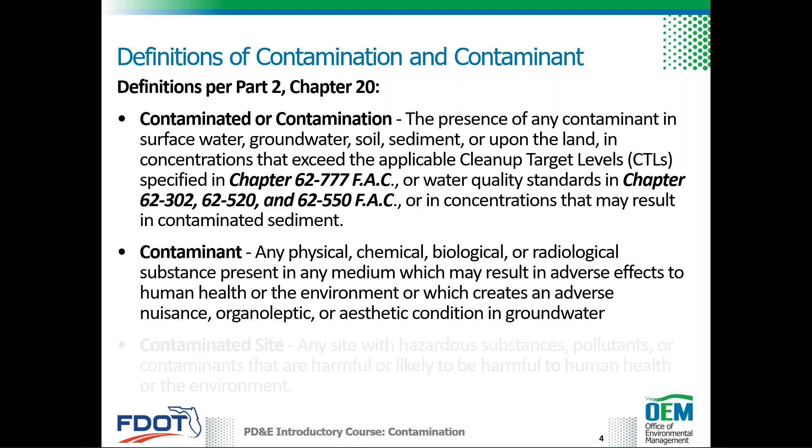And what is a contaminated site? A contaminated site is simply any site with hazardous substances, pollutants, or contaminants that are harmful or likely will be harmful to human health or the environment. So let's talk about risk as it's associated with contamination. Risk has two variables: consequences times probability. Consequences are the severity of impacts due to contamination. Probability is the likelihood that those impacts may occur. There are several types of risk associated with contaminated sites, including human health risk and ecological risk.

There are various steps in a risk assessment that were developed by the United States Environmental Protection Agency, or EPA. First is hazard identification. The first step in a risk assessment is to figure out what you have in the environment that's causing the issue, what type of contaminants you have that may be causing harm to humans and/or ecological systems.

The second step is the dose response assessment, which looks at the numerical relationship between the exposure and the effects of that exposure. Then you do an exposure assessment, which examines what is known about the frequency of the contaminants, the timing, and the levels of contact that you as a human or ecological receptors may have.

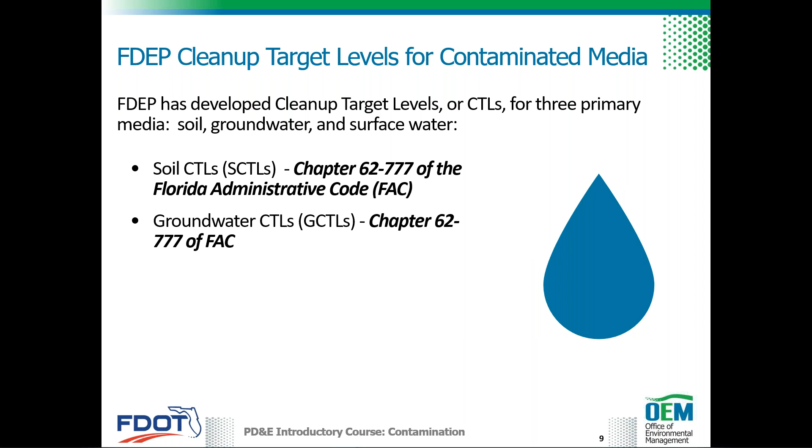Soil cleanup target levels, or SCTLs, can be found in Chapter 62-777 of the Florida Administrative Code, or FAC. Groundwater cleanup target levels, or GCTLs, can also be found in the same chapter. Your freshwater and marine surface water cleanup target levels can be found in Chapter 62-777, 62-302, 62-520, and 62-550 of the Florida Administrative Code.

The EPA, the DEP, and the Occupational Safety and Health Administration, or OSHA, have developed different guidelines for concentrations of contaminants in the air that can be inhaled. These are relevant for DOT projects in the form of asbestos and/or lead contaminated particles.

Let's look at some soil cleanup target levels. These are calculated by the DEP and are provided for direct exposure residential, for direct exposure commercial or industrial, which means those contaminants that could be associated with the soil beneath a building, a factory, or an industry. And then you have leachability of soil that can leach into various different types of water media, especially groundwater.

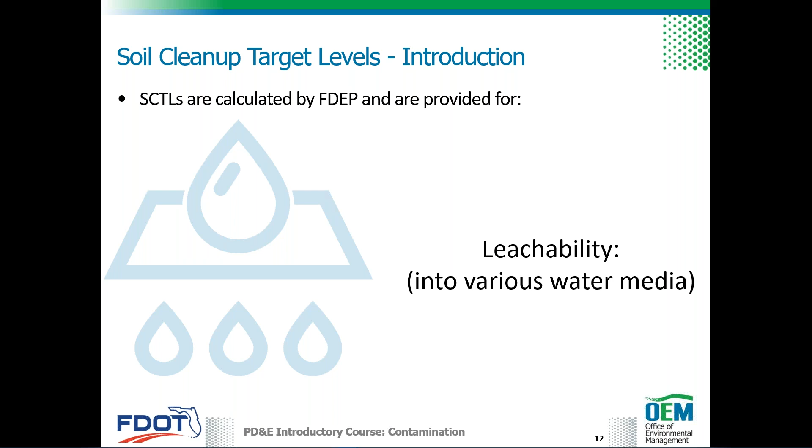Let's look at some soil cleanup target levels. In general, the direct exposure residential soil cleanup target levels are lower than the commercial or industrial, simply because you have different populations that could be affected by those types of contaminants, particularly the elderly and children because they live in residences. And then you have leachability based on groundwater.

These concentrations can also be lower than direct exposure because the value is based on the assumption that the contaminant will be ingested via groundwater, meaning that you're using the groundwater as a potable water source. And then commercial and industrial direct exposure SCTLs are applicable to soils within the DOT right-of-way. So these are the SCTLs that you folks are going to be most concerned with.

There are different units for soil and groundwater. The units for soil are typically measured as parts per million or parts per billion. Parts per million is equivalent to milligrams per kilogram, and parts per billion is equivalent to micrograms per kilogram for soils. For groundwater, ppm or parts per million is equivalent to milligrams per liter, and ppb or parts per billion is equivalent to micrograms per liter.

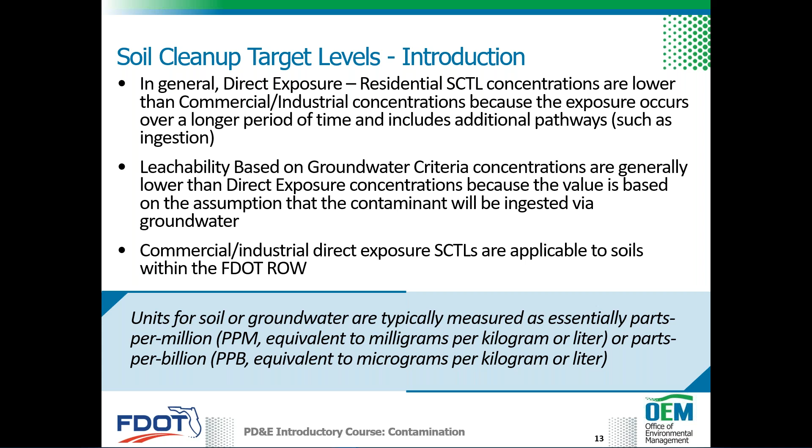So let's look at groundwater and surface water cleanup target levels. They're calculated by the DEP and are provided for the following types of waters: groundwater, freshwater surface water criteria, marine surface water criteria. You'll notice that the surface water criteria is broken up into freshwater and marine, so it depends on what type of water body that you're in, whether you're in a freshwater body or saltwater body. And you also have groundwater of low yield.

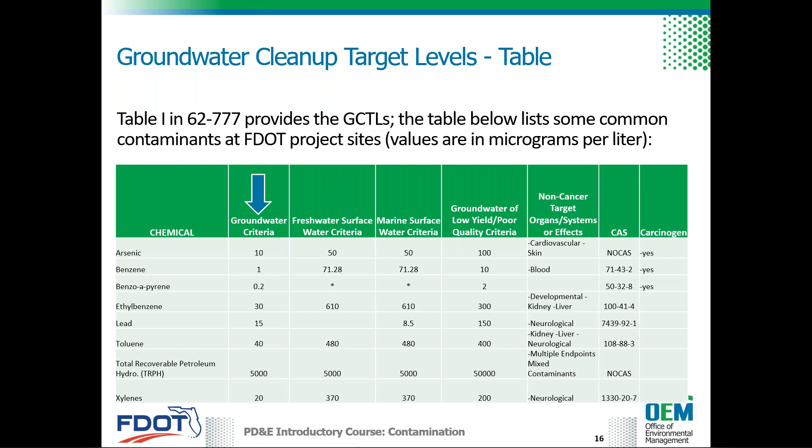So let's go over some acronyms associated with contamination regulations that you should be familiar with.

First one, US EPA, United States Environmental Protection Agency. That's an easy one. It's the federal agency responsible for developing environmental regulations as well as enforcing them. The Florida Department of Environmental Protection has been delegated by the US EPA to ensure compliance and enforcement of environmental regulations. And also RCRA, which is your Resource Conservation and Recovery Act - these are federal regulations that pertain to solid and hazardous waste.

CERCLA is your Comprehensive Environmental Response, Compensation and Liability Act. These are federal regulations that govern the cleanup of abandoned contaminated sites, and this is where you'll hear Superfund, or this is the Superfund law.

And then you have HSWA, which is your Hazardous and Solid Waste Amendments that amended RCRA. SARA, which amended CERCLA, is your Superfund Amendment and Reauthorization Act. And then finally, NPDES, which is your National Pollutant Discharge Elimination System. These regulations pertain to stormwater and dewatering discharges. One thing that everyone should keep in mind is that not only do you have NPDES regulations on the federal and state level, but you can also have them on the county level.

For example, here in Miami-Dade County, Code Chapter 24 also provides information about the specific county regulations for their NPDES program.

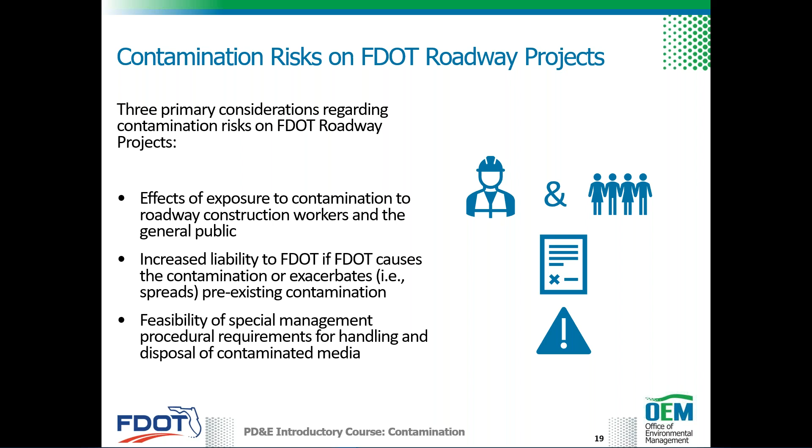There's some regulatory drivers related to this contamination issue, and the primary ones are Chapter 376 and Chapter 403 of the Florida statutes. And also there's some Florida administrative codes - 62-302, 62-550, 62-701, those ones. But the primary issue really is in Chapter 376, which is the pollutant discharge prevention.

And there is a section in there that says this: FDOT is not subject to liability imposed by these chapters for pre-existing soil or groundwater contamination solely due to its ownership. But there's a caveat - it says, however, liability may apply if FDOT creates or exacerbates a pollution source. That's kind of an important thing to know.

There's some other regulations like Florida Administrative Codes 62-730 and 62-780, and the other ones that Laura was mentioning: RCRA, HSWA, CERCLA, and SARA. All of those apply when we're looking at assessment, remediation, and disposal.

A couple of things related to DOT's obligations to federal highway, especially when it comes to NEPA. There is a contamination impact requirement. DOT assumes federal highway's responsibilities for NEPA, especially for the state highway system and the local agency programs. Federal highway has the responsibility for anything with federal funding.

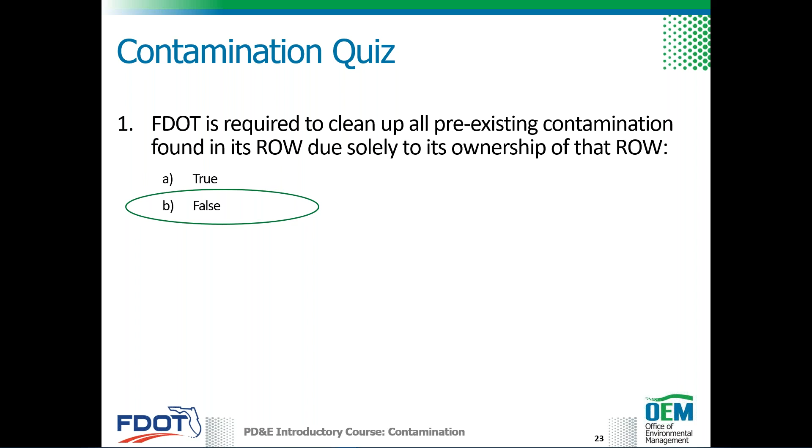Some other considerations for contamination projects: there's a contamination level of effort that increases as you go from PD&E through design to construction. There should be avoidance methods during planning and PD&E, and the impacts need to be considered when you're looking at design modifications or crafting special provisions, especially how you're handling and disposing of contaminated material.

Contamination is normally addressed by the DOT PMs and the DCICs, but it could include right-of-way staff, design, construction, maintenance, and OGC.

A couple of definitions and acronyms we probably should go through. First one is the DCIC. What is the DCIC? He or she is the primary person responsible for addressing contamination issues in your district, usually out of the environmental office.

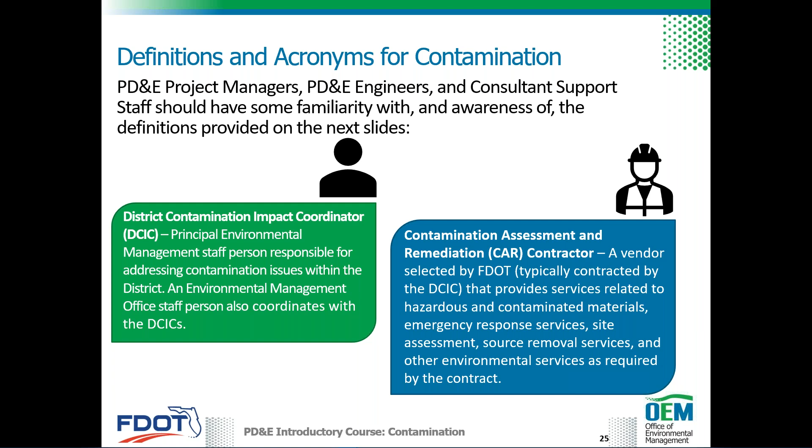Also, there's a contamination assessment and remediation, or CAR contractor. It's usually a vendor selected by DOT, typically by the DCIC but not always, that performs the services for the hazardous and contaminated materials, as well as several others.

The level 1, or CSER, Contamination Screening Evaluation Report, is an evaluation of potential contamination along all proposed project alternatives, and it's really used to determine the scope of further assessments.

The level 2, also known as an Impacted Construction Assessment or ICA, is the detailed evaluation of those sites and really is done for the medium and high rated sites. You're looking for the extent and type of contamination, and also determining any potential construction impacts, possibly even associated costs.

That then leads to the level 3, which is the actual remediation or abatement of that contamination. There's usually a detailed plan for the removal and disposal of media and storage tanks or any other contamination that is needed.

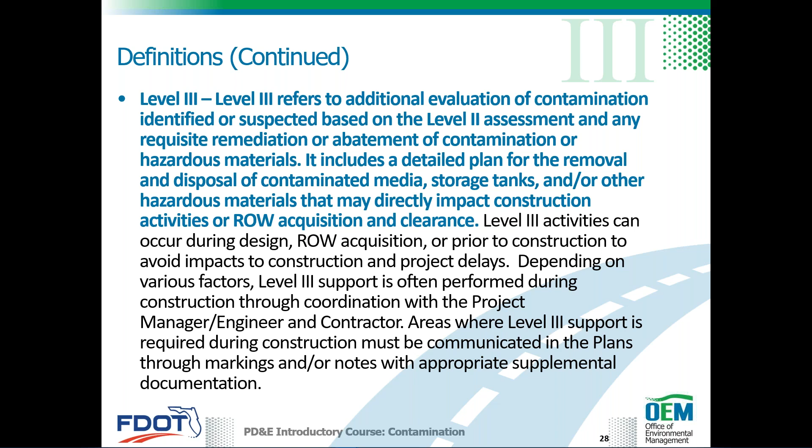Some other frequently used acronyms: ACM. Let's talk a little bit about that. Asbestos containing materials - this is any material that has more than 1% asbestos.

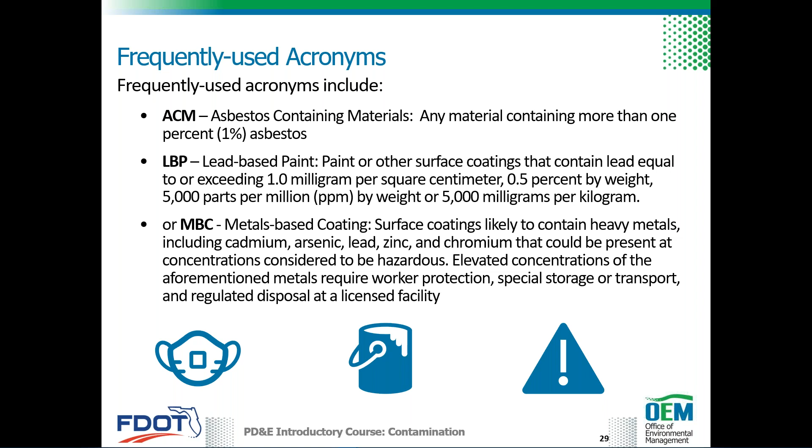Lead-based paint is paint or other surface coating where the lead would exceed 0.5% by weight. There's also metal-based coatings, which are coatings that can contain heavy metals, including cadmium, arsenic, lead, zinc, and chromium, present in concentrations that would be considered hazardous.

A couple other ones to talk about. The MSP, this is the Modified Special Provision - a provision to address a specific project need, usually approved by the state specification engineer. And then we have a technical special provision, which is the technical version of a special provision that you would need for any technical issue, such as contamination remediation. That should be included in the appendix for the contractor's information.

And that's all we have for this first one. Please let me know if you have any questions.

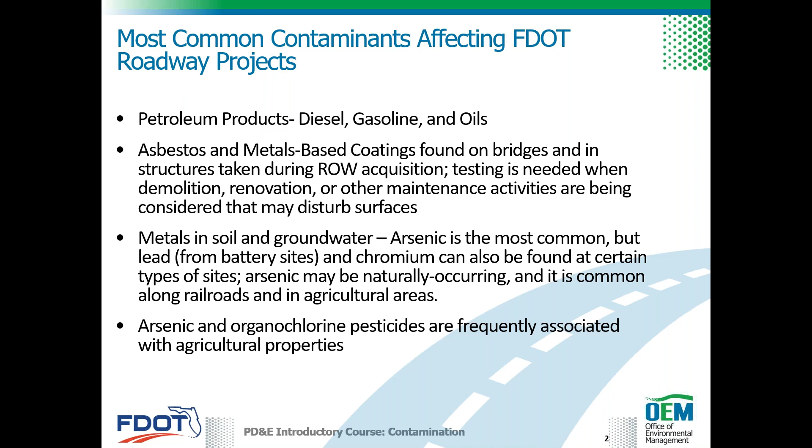While some of these wastes may not technically meet the definition of contaminated or hazardous, FDOT often uses a contractor to handle their removal and disposal.

Here are some project considerations. We're going to run through several of these for your FDOT project during the PD&E phase or early in the project phase. Has an evaluation been done to identify potential sources of contamination that may overlap new right-of-way or project alternatives? Has somebody already looked at this? Are there impacts to design, or are avoidance measures possible? Can we avoid the contaminated sites, or do we need to account for them during the design?

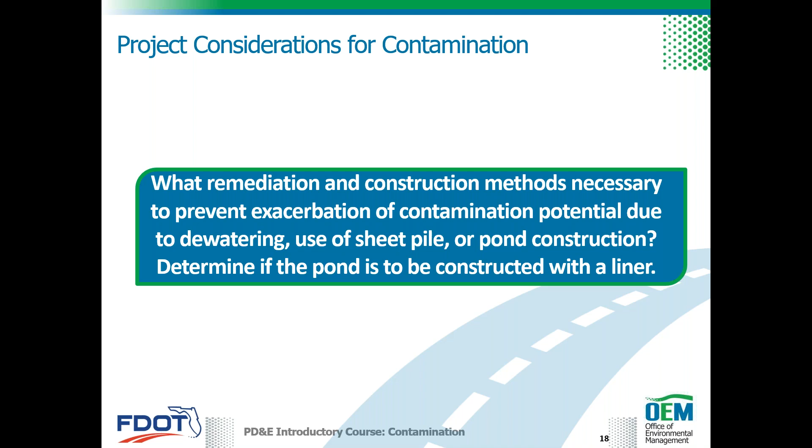So those are all some considerations for contamination when you're reviewing your project. We're going to talk a little bit about how to do that, different sources of information that you can use to review the contamination potential. Reviewing the potential scope of contamination involvement involves steps in every phase of the project. The goal of contamination review is to identify contamination issues early so that they can be avoided or minimized. The level of investigation may increase as the project progresses, but only if it's warranted.

The first part of the process is the ETDM screening and project scope development. The ETDM screening allows for early regulatory review of the project. The planning screen helps identify potential contaminated sites within or adjacent to the project, while the programming screen helps determine whether a level 1 investigation may be needed.

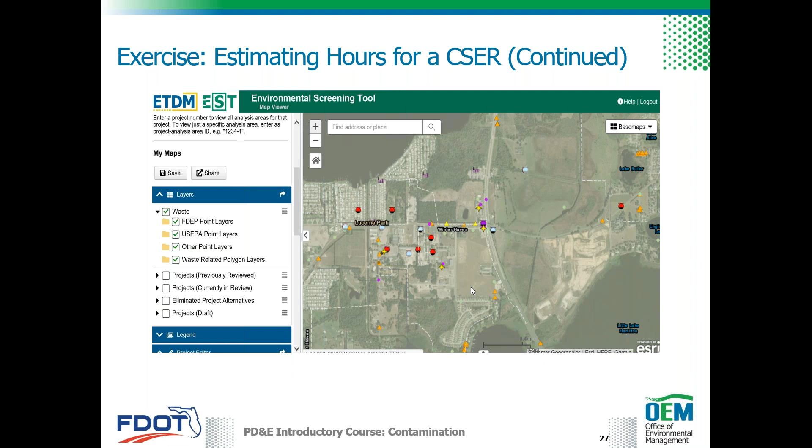After reviewing the ETDM EST physical contamination waste layers screen for the entire length of the project, a total number of 32 potential contamination sites were identified. The 32 potential sites were multiplied by 3 for their moderate complexity and potential available documents. So remember, it ranged from 1 to 4, and this estimate chose 3. And that gives you a total of 96 hours.

Since the project length was between 5 to 10 miles, the estimated field work hours were 24. Remember, it was a maximum of 24. 40 hours were allocated for the report, which is part of the formula, and added to the analysis hours, which yields 136 hours for the analysis and reporting. Then the total hours for the entire CSER effort are estimated at 160 hours.

While this exercise provides a good ballpark estimate of the CSER hours, it is not used by all districts. The DCIC in each district should be consulted to determine if there are additional considerations and to approve the hours for specific projects. So this is just an example, and you can go through it with your DCIC per district as you guys are developing hours.

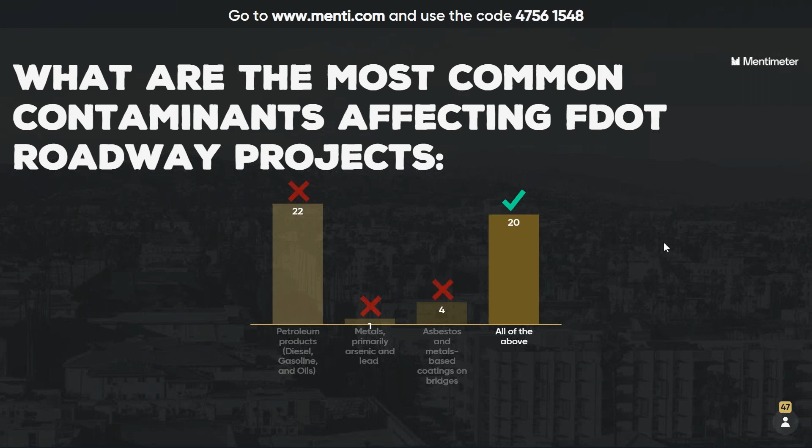All right, let's go to the second question here, and we'll see who is in the lead. Question 2 of 2. The potential presence of USTs and ASTs in a right-of-way acquired by FDOT is an important consideration regarding contamination. True or false? Time's up. True. Potential presence of USTs and ASTs in a right-of-way acquired by the FDOT is an important consideration regarding contamination. Nice job. All right, let's see who won.

Bodie McBoatface. Very nice. Followed closely by the Penguin and Chelsea. Nice job, you guys. Woohoo. All right, I am going to pass the presentation back over to Lauren. Thank you. All right, can you guys see my presentation screen? Yep. Perfect. Thanks, Christina.

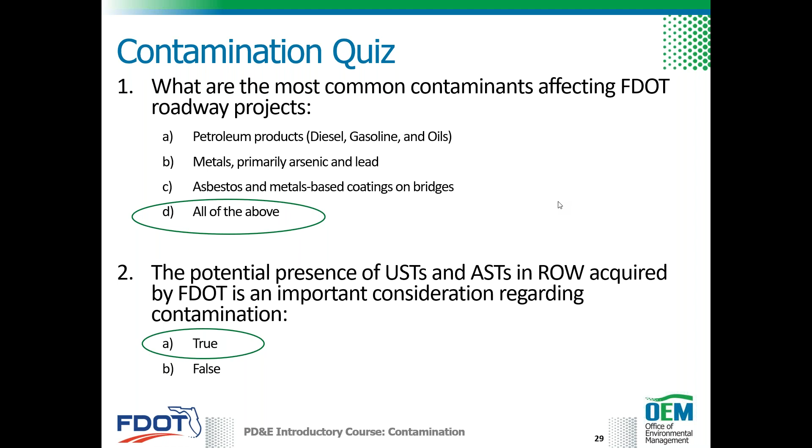All right, so now we're going to talk about some of the environmental documents during PD&E. Environmental documents are developed as part of the NEPA process and are required to contain contamination information. The contamination documents are used to support the following types of documents as part of the NEPA process. So remember, these are required. Type 1 and Type 2 categorical exclusions, or CEs, and non-major state actions. These are your different types of environmental documents, by the way.

Environmental assessments and environmental impact statements, or EA and EIS, you'll hear that term a lot. State Environmental Impact Report is a SEIR, and then reevaluations, which we will be talking about in a later lesson. For both Type 1 categorical exclusion and a non-major state action, or NMSA, contamination involvement is considered, and a brief summary is included in the appropriate checklists.

Type 1 categorical exclusion checklists use form number 650-050-12 under Part 1, Chapter 2 of the FDOT PD&E Manual. Non-major state action checklist uses form number 650-050-30 under Part 1, Chapter 10 of the FDOT PD&E Manual. For both types of projects, the Level 1 Evaluation Report, your CSER, or the Technical Memorandum, as well as any subsequent evaluation information, is included in the project file.

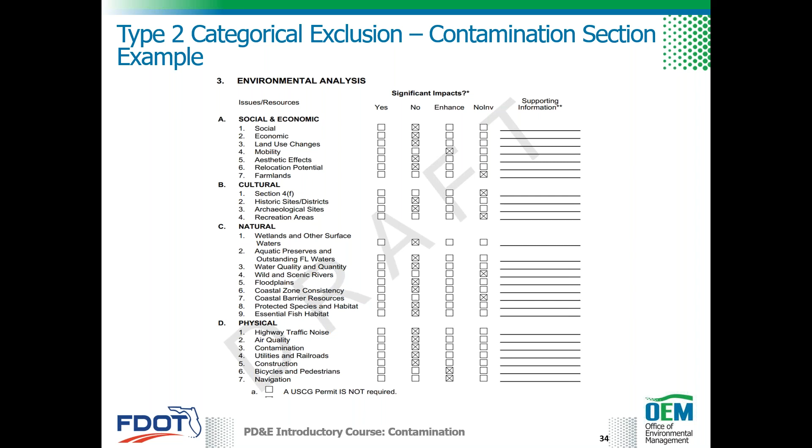All right, moving on to an EA and EIS. CSER findings are summarized in the environmental analysis section of the environmental assessment or environmental impact statement. So that's over here, your comments and coordination section. A summary table of impacts for each alternative should also be provided. The comments and coordination section of an EA or EIS should discuss and include letters from agencies expressing comments on the Level 1 evaluation, and resolution of those comments shall be documented in this section.

For an EA with a finding of no significant impact, or a FONSI, the document will include a statement indicating the effect of the project. If contaminated sites affect the preferred alternative, the impact should be discussed in the FEIS ROD, FEIS, or EA with a FONSI. These documents should also discuss the remediation and mitigation measures planned to eliminate or minimize the impacts of contamination. As with other NEPA documents, the appropriate documents need to be uploaded in StEPP.

SEIRs, this is the last one, SEIRs should summarize the results of the contamination screening evaluation in the environmental analysis section of the SEIR form number 650-050-43. The summary should answer the following questions. Are there known or potentially contaminated sites within or near the project area? How did the project avoid or minimize impact to any known or potentially contaminated sites? And are there sites that require additional investigation for a Level 2 assessment?

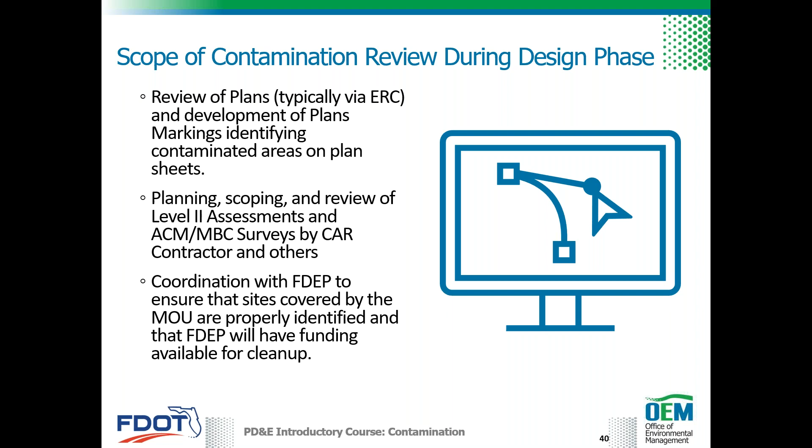Plans are reviewed and additional level 2 investigations take place to identify areas of contamination, including potential for ACMs and MBCs. In some cases, contamination involvement can be avoided with minor design changes. Coordination with FDEP should take place for sites involved in FDEP petroleum cleanup programs. So these are contamination items to review during the design phase.

Keep talking about that. Planned right-of-way acquisitions should be evaluated for their potential contamination involvement. Also during design, potential pond sites, stormwater management facilities, SMFs, and floodplain compensation sites should be evaluated. Drainage features and drainage easements should be evaluated if there are potential contamination impacts to construction activities. So don't forget the drainage and those impacts.

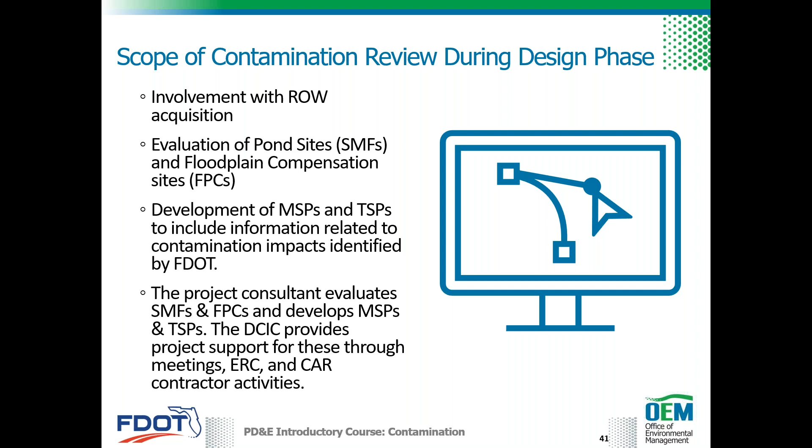During design, project managers should coordinate with the DCIC to develop modified special provisions and technical special provisions for projects that may have contamination impacts, including those that involve remediation, solid waste removal, or dewatering permits. The contamination review then evolves further as the project enters the construction phase. So we've talked about planning and PD&E, then we talked about design, and now we're talking about construction.

For projects with identified contamination issues, the project manager and DCIC or their representative should attend the pre-construction meeting and coordinate closely with the construction PM to ensure the contractor is fully aware of potential contamination involvement, any commitments, remediation activities, avoidance measures, or any further coordination or measures as needed. This may include coordination with the district's CAR contractor. The CAR contractor's activities are managed and funded through the DCIC's CAR contract.

The DCIC typically funds remediation of contamination by obtaining funding through the work program and then implementing the funding using letters of authorization to the CAR contractor. The DCIC will coordinate with project managers, project management to maintain awareness of the project letting schedules and construction milestones. And the DCIC and PM should ensure contamination commitments made during the PD&E and design are properly completed. So this is part of the coordination of the contamination from beginning to end of the project and making sure that all commitments made are properly completed.

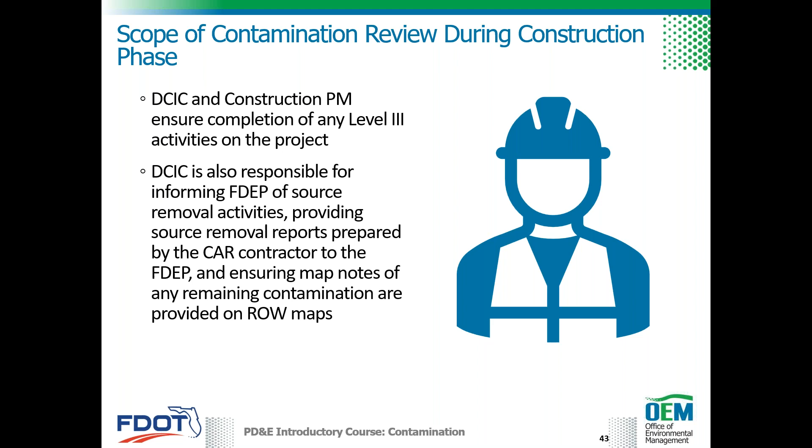The level 1, 2, and 3 process, the progress and purpose of the contamination evaluations and remediation. The level 1, 2, and 3 processes have been developed to identify contamination concerns early and minimize their overall impact to construction, resulting in a safer and less expensive project.

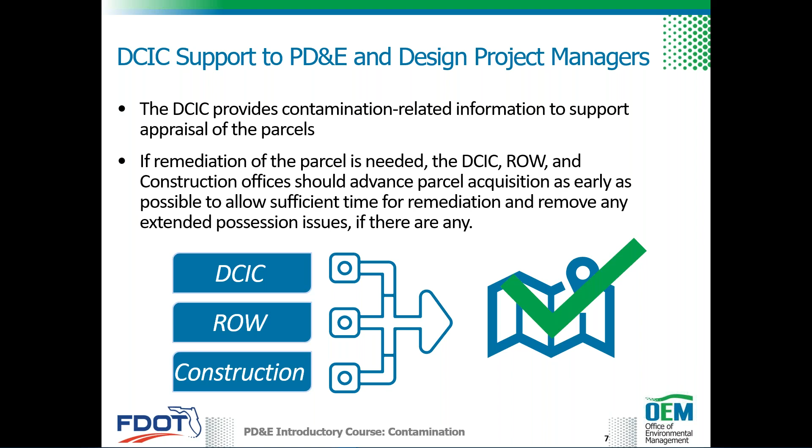So I'll do some quick asbestos and metal-based coating survey basics. First off, asbestos is a mineral fiber and it adversely affects the lungs if inhaled. There is a procedure in the right-of-way manual, 575,000, that talks about ACM surveys and abatements. ACM is governed by federal laws, including the NESHAP, which is the National Emission Standard for Hazardous Air Pollutants, and it's also regulated by OSHA, the Occupational Safety and Health Administration.

Asbestos, as well as lead-based paint, were banned from most products, but not all products, in the 1970s. So most buildings constructed after the 1980s likely do not contain asbestos or lead, but that doesn't mean it's a guarantee.

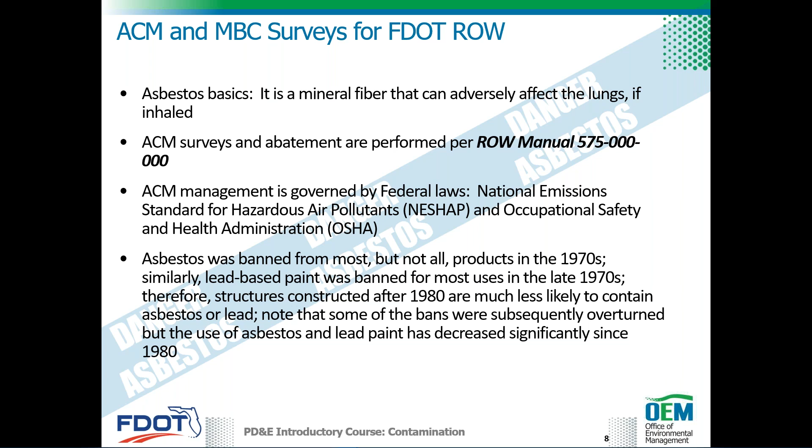The Environmental Protection Agency, or EPA, has delegated NESHAP to DEP, the Florida DEP. For that program, there is a 10-day notification prior to the demolition or renovation of any structure, and that includes bridges.

All demolition notifications are required, even if there's no asbestos present. Also, there is a delegation that the DEP has done to some local regulatory agencies as well.

When you look at ACM and metal-based coatings, really what you want to do is you want to be able to do them as early in the design process as possible, because the abatements for those could affect the project schedule and can be time consuming depending on what you're doing to the building or structure.

FDOT requires that the contractors that they hire assume that ACM and metal-based coatings are present in any buildings built prior to the 1980s. Therefore, an asbestos and metal-based coating survey should be done for those buildings or structures.

And now I'm going to turn it over to Laura. She's going to take care of some of the asbestos issues.

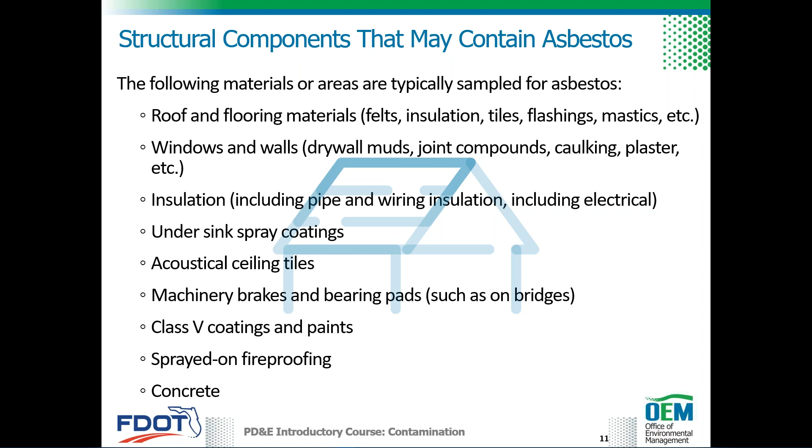And lastly, concrete. Let's look at asbestos-containing concrete, because most people don't think asbestos is contained in concrete, but it can be found in concrete. A product called Transite was commonly used from the 1930s to 1980, and it contains up to 50% asbestos. Transite was very commonly used as a siding material on buildings, residences, and structures.

It was also used in corrugated roofing tiles, siding as I talked about, roof gutters, wallboard insulation, and various piping. Its most common occurrence in the DOT project is old abandoned water lines, including municipal as well as private water lines. If you find these pipes, they must be removed. Crushing and leaving the pipe in place is a violation of safety protocols.

Asbestos may also be found in other types of concrete, such as foundations, slabs, and structural supports, but Transite is the primary type of asbestos cement.

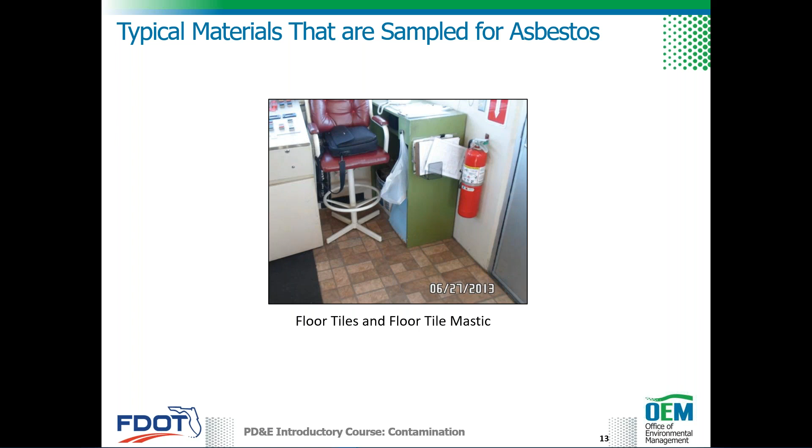So let's talk about some of the asbestos sampling methodology. What would you use in order to determine if a material contains asbestos? To do an asbestos survey, you have to be certified — you have to have a certification — and you have to perform your survey under a licensed asbestos consultant, or LAC. You also have to perform your abatements under an LAC, with properly trained, certified personnel.

When you go to do an asbestos survey, you look at the building or the bridge and figure out your homogeneous sampling areas, or HSAs. Typically these are areas suspected to contain ACM. So you look at a building and say, okay, I'm going to sample the roof, the wallboard, the tile — and those would each be separate HSAs.

How would you sample? Basically you use what you can to get the material off the structure and into a sample bag — a chisel, a knife, or a similar tool. I've used screwdrivers, crowbars, anything I can to get a sample. Typically you collect 3 samples per HSA, sometimes more, following the 3-5-7 rule, depending on how large an area or HSA you're sampling from.

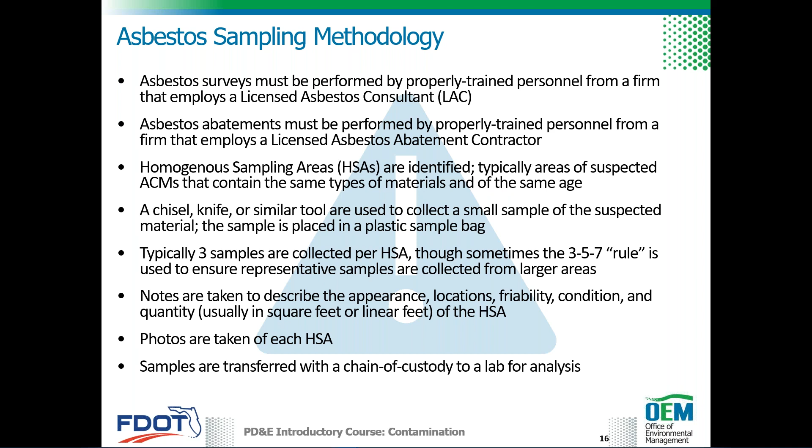Then we take notes to describe the appearance — the color, the texture, where it's located, the friability. Can you crush it between your fingers? If not, it's not friable; if you can, it is friable. The condition — is it in good shape, bad shape, poor shape? And the quantity, usually defined in square feet or linear feet, which is important for your abatement because you want to know the quantities you need to abate. Then we take photos of each HSA as documentation, and the samples are transferred using a chain of custody to the lab for analysis.

So let's talk about analysis used to determine the asbestos content of the materials. Your asbestos samples are going to be sent to a laboratory that's certified by the National Voluntary Laboratory Accreditation Program for analysis. There are really two different types of analysis used when determining asbestos.

The first is PLM, or polarized light microscopy, and this is an estimate used to determine a percentage of asbestos-containing minerals in a sample. A sample is considered to have ACM if it contains more than 1% asbestos fibers.

When a PLM sample contains less than 10% asbestos fibers, you can use a more accurate method called the EPA point count method. You use this method when you have a substance that's suspect for asbestos but comes back negative, yet you really think that it is. Or if a substance came back with a percentage just a tinge more than 1%, like 1.5 or 1.2, you'd want to run this method.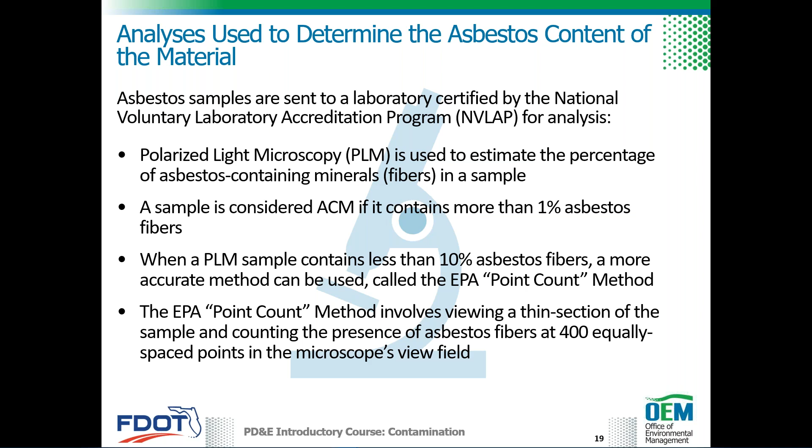This involves viewing a thin section of a sample, and you actually count the presence of asbestos fibers at 400 equally spaced points in a microscope's view field. It's a pretty tedious process, but it's highly accurate, and because of that, the point count method will supersede the PLM results.

Now let's talk about the contents of an asbestos survey report. Say you had someone go out and do an asbestos survey, and you have a report in front of you, and you need to know what should be contained in it to accurately determine what materials contain asbestos. The report should contain the methodology used to survey and sample the asbestos or suspect ACM, the findings, photographs, the certifications of the surveyor and the consultant, and the laboratory data sheets or results.

It should describe which materials are ACM, which materials came back greater than 1%, or if they did the point count method. They're going to provide recommendations for abatement of any ACM areas.

But sometimes the ACM needs to stay in place, and in that case, the consultant may provide an operations and maintenance plan for any ACM that is not going to be removed.

Some consultants also provide cost estimates for abatement and O&M activities, using the square footage or linear footage of the sampled material that came back positive for ACM as the basis for the cost estimate for removal of that material.

It also discusses any material that may contain asbestos but couldn't be accessed during the asbestos survey. This is important because a lot of times, especially on bridges, certain areas such as bearing pads can't be accessed, so you may presume them to contain asbestos. Asbestos abatement activities are considered level 3 activities.

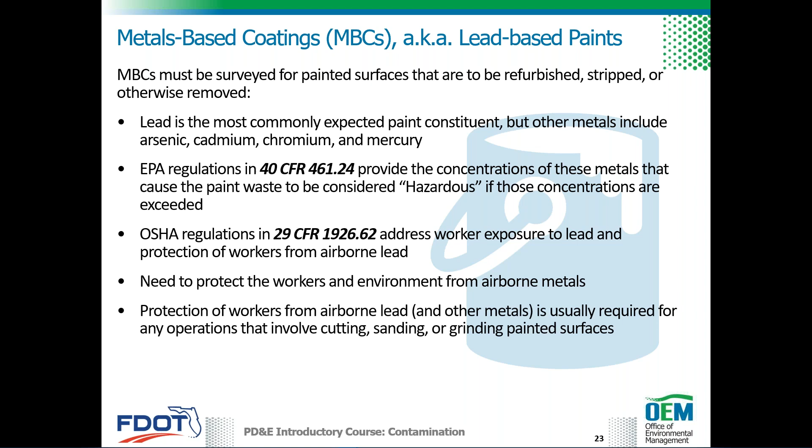OSHA regulation 29 CFR 1926.62 addresses worker exposure to lead and protection of workers from airborne concentrations of lead. You also need to protect your workers and the environment from airborne metals, and you also need to protect your workers if they're doing any type of cutting, sanding, or grinding on painted surfaces that are suspect to contain lead or the above mentioned metals in the paint.

So the presence of any of these metals requires worker protection. We already talked about that, but the paint waste is tested using the TCLP, the toxicity characteristic leaching procedure. You can do the TCLP for these different metals, and these different metals have different regulatory levels. For instance, lead has a regulatory level of 5 milligrams per liter. So if you exceed that in your paint chip sample analysis, then you're hazardous for lead, and it has to be disposed of and handled as hazardous waste.

So let's look at some metal-based coating surveys, methods, analysis, and reports. Your paint chips, you collect them using various bladed tools. I've collected them using an X-Acto knife or a box cutter. I've used a paint scraper, and sometimes the surface is so loaded with paint you can actually peel off the paint chips from the surface.

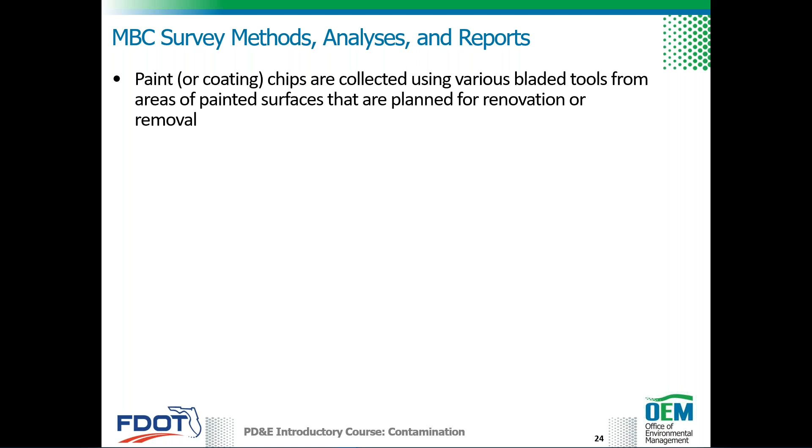The chip samples are submitted to the lab for analysis, usually by EPA method 6010, which is total metals, or method 7471 for metals including mercury. You can also do an alternate method, a quick and easy way to determine if you have lead in your paint. This uses an XRF, X-ray fluorescence, analyzer gun to directly measure lead content in milligrams per centimeter squared.

However, even if the XRF is used, you sometimes want to take chip samples and submit them to the laboratory for backup, just to confirm your results. Also think about multiple paint coating layers that may be present. When you go and look at an older structure, there can be various different paints that were used, so you really have to make sure you grab all the paint layers in order to obtain an accurate sample. It's hard to separate them out, but it can be done.

So let's look at some further survey methods, analysis, and reports. Analysis by total metals and TCLP may be used initially, but these analyses will also be used by disposal facilities to determine waste disposal. Again, you use TCLP to determine the concentration of the metal in the paint chip that you're collecting, and if it exceeds the TCLP regulatory level, which can be found in the CFR as well, then you have to handle the material as hazardous waste.

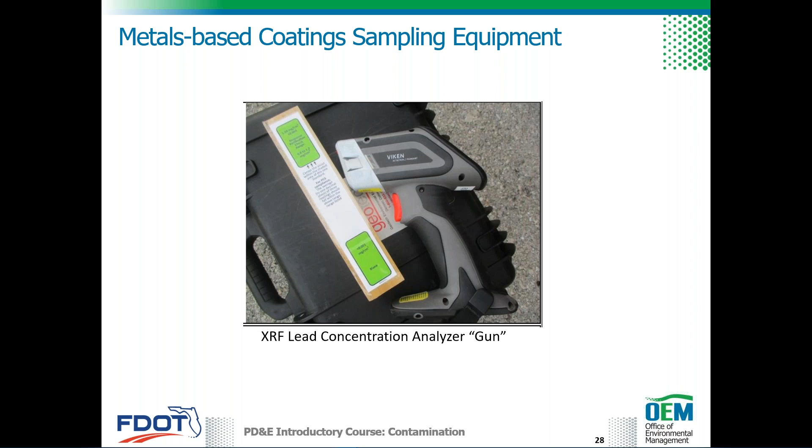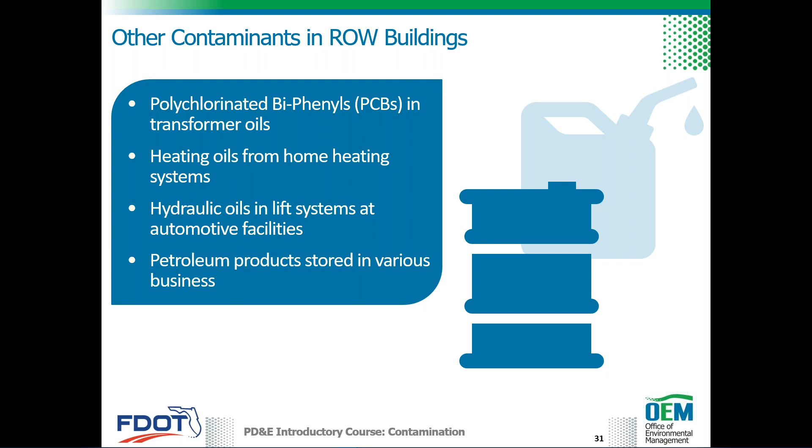The other contaminants you need to be aware of in right-of-way buildings are polychlorinated biphenyls, PCBs. These are commonly found in electrical transformer oils, heating oils from home heating systems, hydraulic oils in lift systems at automotive facilities, also in elevator shafts in structures that have elevators, and also petroleum products stored in various businesses.

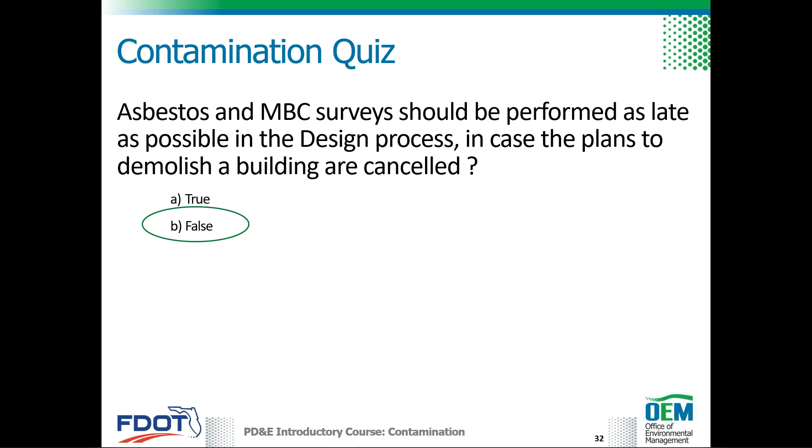It needs to be performed as early as possible in the design process. Thank you very much. If you have any questions, I'll be happy to answer them.

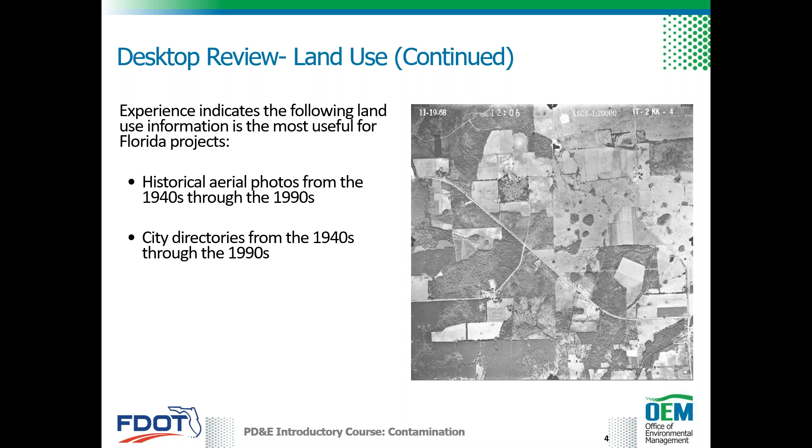This may list former gas stations, dry cleaners, and other businesses of concern that may have been redeveloped with a different business. Also mentioned earlier, the Sanborn maps, in downtown areas of urbanized counties such as Pinellas, Hillsborough, Orange, Broward, Duval, Miami-Dade, etc.

And of course, reviewing ground level photography on Google Earth Street View. Google Earth also provides aerial photos going back to the 1990s - I've seen it even earlier, just depending on the area. So you can check out Google Earth Street View and use that little time lapse button and scroll on back. It's pretty neat to see the development.

So historical aerial photos are used to review land uses along a project over a period of time. Here in Florida, aerial photography is usually available in most areas dating back to at least the 1940s and sometimes further back. It's helpful to review aerial photography for at least 1 year per decade.

Historical photos from the 1940s to the 1990s are especially useful for showing potentially now covered landfill sites and other disturbed areas, former gas station sites that have been redeveloped, etc. Aerial photos may help identify landfilling or other earth disturbance activities, historical non-regulated gas stations, past agricultural uses, trucking facilities, possible cattle dip vats, heavy industrial uses, and other types of historical land uses.

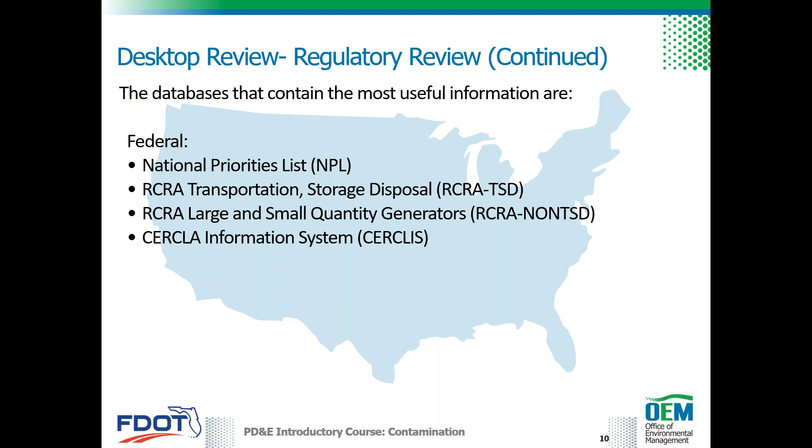Experience working on desktop reviews has identified that of the regulatory databases available, the following are most useful. The Federal National Priorities List, or NPL, the Resource Conservation and Recovery Act, or RCRA, CERCLA, and the ERNS databases. While the state database sources are usually the most useful information, federal databases such as the Superfund website and EPA EnviroMapper may also be useful.

The state or FDEP databases that are most useful are the Tanks and Leaking UST, Solid Waste Facilities, Brownfields, Waste Cleanup, Dry Cleaners List, and of course the Institutional Controls Registry, or ICR.

Experience has shown that the following regulatory resources tend to be the most useful during the desktop review. The regulatory database sites developed from the EST or ETDM contamination screen or a commercial vendor database. File review in FDEP Oculus system using the storage tank, hazardous waste, waste cleanup, discovery compliance, permitting authorization, etc. Using the FDEP Map Direct, Institutional Control Registry, and Contamination Locator Map to identify active petroleum and non-petroleum cleanup sites.

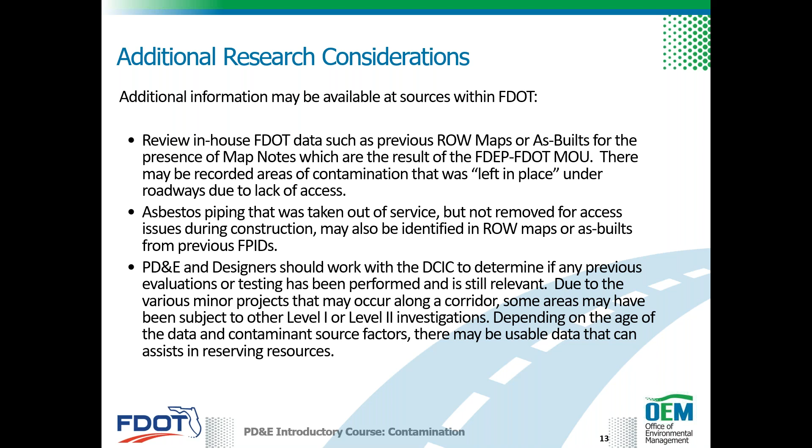And of course, the PD&E and designers should work closely with the DCIC to determine if any previous evaluations or testing has been performed, and if that's still relevant for the project. So once sites are identified using screening databases, the actual records, such as monitoring reports and inspection reports, can then be reviewed. In Florida, the most useful database is FDEP's Oculus database, especially if the facility's ID number is known.

The Oculus database contains a series of catalogs depending on the land use of a site of interest, such as storage tanks, hazardous waste, solid waste, etc. And each site typically includes a number of profiles, such as cleanup and remediation or discovery and compliance, which contain relevant reports. The FDEP main website provides general information about each program. Other FDEP data sources, such as the Contamination Locator Map, Institutional Controls Registry, Map Direct, and of course the STCM database, are all linked directly to the Oculus database. That's pretty nifty.

So we're going to have two exercises in reviewing regulatory data from easily accessible online databases here in Florida. The first is the FDEP Contamination Locator Map, and the second is FDOT's ETDM. This slide shows a map of a roadway project and pond sites in Citrus County with the listed regulatory sites shown in red, yellow, and green symbols in the legend. This type of database report is typically provided in a CSER, but it might be months or even more than a year old by the time the CSER is actually reviewed and approved.

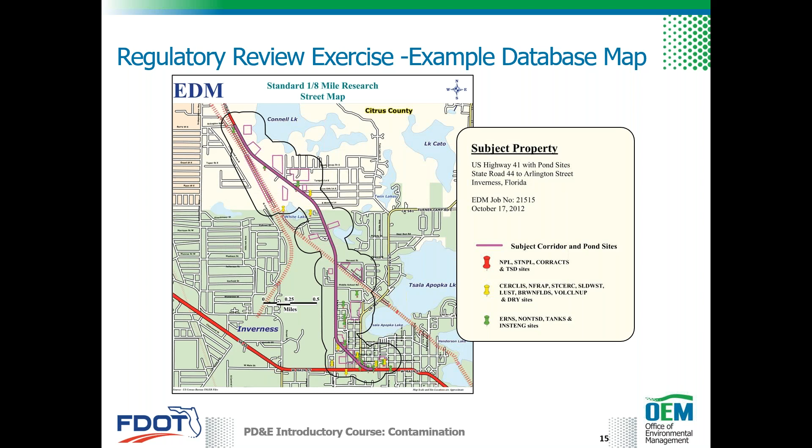The first exercise is to determine if there are any open discharge sites currently along the project. We've pulled up the FDEP Contamination Locator Map for the project area, and noted several green triangles and 2 yellow triangles along the project. The green triangles represent open discharge sites in the FDEP Petroleum Cleanup Program. Yellow triangles indicate open discharge sites in the Waste Cleanup Program. Having an open discharge means the site has not obtained regulatory closure, and is likely in a groundwater monitoring program or actively being remediated.

Note that only a few sites in the EDM map from the previous slide have open discharges. Open sites may also be newly discovered sites, new releases, or sites still under investigation. They also might be in the assessment phase. Clicking on one of these green triangle sites identifies it as St. Peter's Shell, located at 704 West Main Street. This screen also allows you to click on a documents link to the latest documents in the FDEP Oculus file system, like I mentioned earlier.

Clicking on the documents link shows that the site is undergoing remedial action, and the contractor has recently submitted a remedial action interim report, which was reviewed by FDEP. Clicking on the red triangle on the right side of the screen allows you to review the FDEP warning letter, review documents, and reports submitted regarding the site. Information in Oculus often goes back to the 1990s because many older files were scanned and uploaded after the Oculus system became fully operational around 2004.

So after scrolling down the information link, the reviewer can then click on the More Info link for the document L. And that document L links to the FDEP Oculus, or they can click on More Info by Google Map, which then links them to the site image on Google Map. Clicking on the More Info link allows the user to have access to the same type of screen linked by the FDEP Contamination Locator Map, except this is for any petroleum site, regardless of its regulatory closure status.

Because the quality number 188 is an active gas station, the Oculus files indicate a number of records relating to the most recent inspections of the facility. In the case of this site, there was a limited closure assessment performed in January 2019. The most recent storage tank compliance inspection occurred on September 9th, 2020. And as before, clicking on any of those red triangles on the right side allows review of the inspection documents and closure forms.

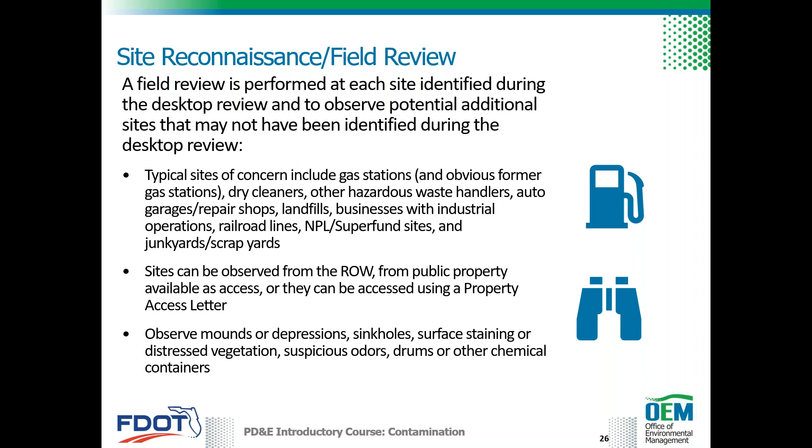Citrus groves are frequently identified as potential contamination sites also. Although herbicides and pesticides are normally spread throughout the site per manufacturer's instructions, there can be significant contamination in areas where the herbicides and pesticides are mixed with water. Large spills might also happen. Also, many citrus groves have diesel-powered pumps for irrigation, with petroleum ASTs ranging in size from 550 to 1,000 gallons. Those definitely present potential petroleum releases.

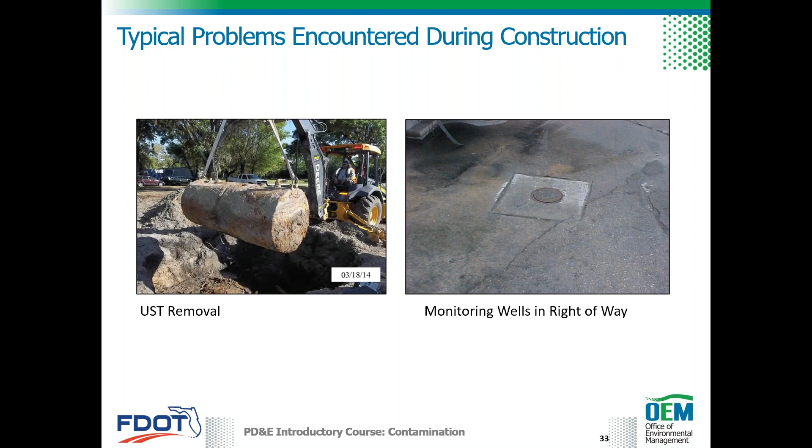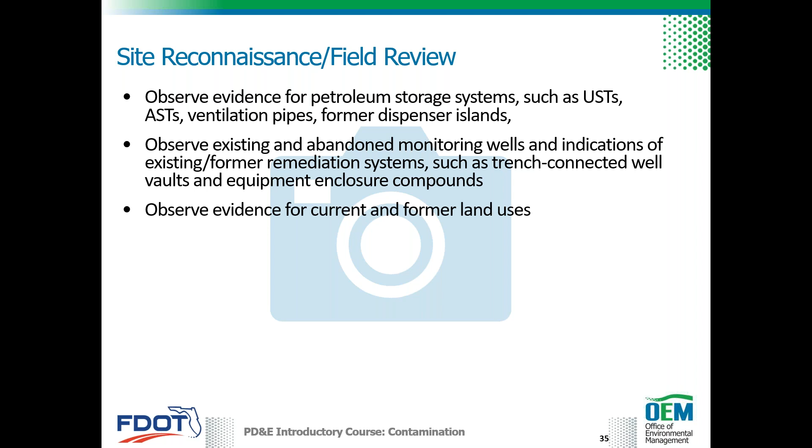The field review should also include observing evidence for petroleum storage systems, such as underground storage tanks and above ground storage tanks - USTs and ASTs - ventilation pipes, former dispenser islands, etc. It should also include observing existing and abandoned monitoring well sites and indications of existing or former remediation systems, such as trench-connected well vaults and equipment enclosure compounds, etc. The evidence of current and former land uses, as well as information regarding above ground and underground utilities, should also be noted.

Photographs should be taken of each site as well, and thorough notes.

Bridge crossings should also be observed for their bridge number, estimated age, condition of surfaces, paint, concrete, etc. The district structures engineer and district bridge engineer, maintenance engineer, facilities engineer, they may have additional information acquired during surveys or previous maintenance activities regarding the ACM and LBP on structures and bridges.

A field review is performed to validate locations of facilities identified during the desktop review, observe current conditions at locations where features of potential contamination were identified on aerial photographs, city directories, and Sanborn maps, and to identify indications of potential contamination that were not identified during the desktop review. So it's really important to get out in that field.

Interviews, let's talk about interviews. Interviews with present and past owners, operators, and/or occupants of the properties with contamination concerns, and local government officials such as the fire department staff. Those may be used to verify or supplement the results of the desktop and field reviews. Interview resources typically include interviews with knowledgeable site owners or site occupants. Discussion may include recent and historical uses of the property and any involvement with regulatory agencies or the fire department.

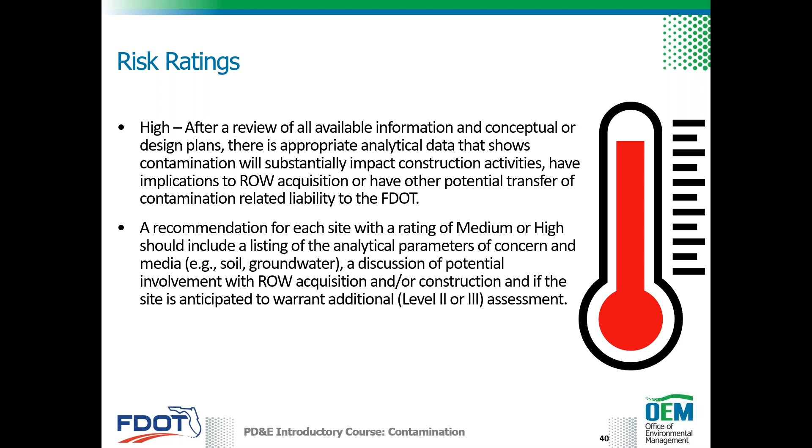The rating should consider proposed construction activities and determine if the scope of work may cause direct contact with the contamination. The risk ratings must also be seriously considered because medium and high rated sites will be evaluated further. A rating of medium or high should include a listing of the analytical parameters of concern and the media affected.

And the ratings can actually change based on changes in the design, methods of construction activity, for example, driven piles versus drilled shafts. It can also change based on right-of-way needs and a whole bunch of other factors, so they can change.

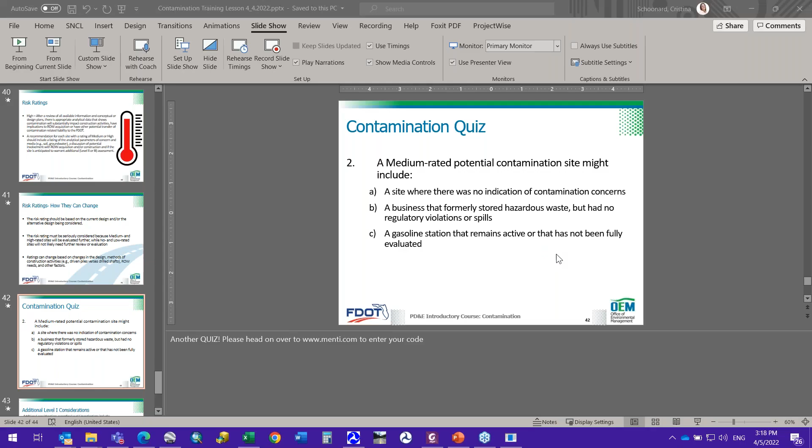Additional considerations regarding level 1 investigations include that a level 1 desktop review and site visits may not be able to identify all contamination concerns. The level 1 is based on best available information. As such, unregistered tanks, unreported spills, and previous regulatory requirements may result in concerns not being identified.

If unknown, these concerns or impacts are unlikely to be investigated during level 2 testing, unless, of course, it's found by luck, and thus may not be discovered or encountered until construction. The level 1 and level 2 investigations are conducted to help avoid construction contractor delays, claims, and costs due to contamination. These can add significantly to costs going over budget and cause schedule delays. No one likes that.

Although it's impossible to identify every single concern on every project, it's easy to see why careful evaluation is very important. You've got to utilize all your available tools, do your desktop review, go out to the field, have conversations with people who are at those sites, and make sure you leave no rock unturned.

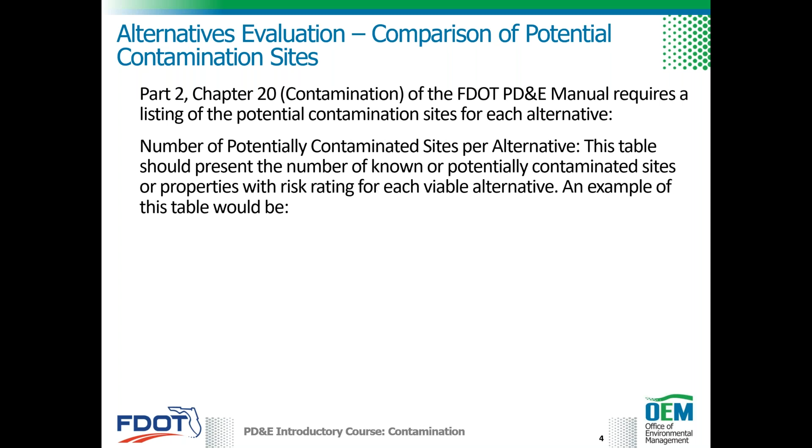An example format of this table, as required in Part 2, Chapter 20, is provided here. Information from the CSER is then used in other PD&E documents, such as the Preliminary Engineering Report, or PER. The alternatives matrix in the PER includes a table comparing impacts from contamination resource along with other resources.

This is an example of an alternatives comparison table. This project, which happened to be in District 3, had 4 primary roadway alignment alternatives in addition to the no action or no build alternative and the Transportation System Management and Operations (TSM&O) alternative. The no build and TSM&O alternatives did not involve ground disturbance such as excavation as part of the project, and therefore did not have any contamination sites associated with them, as the table shows.

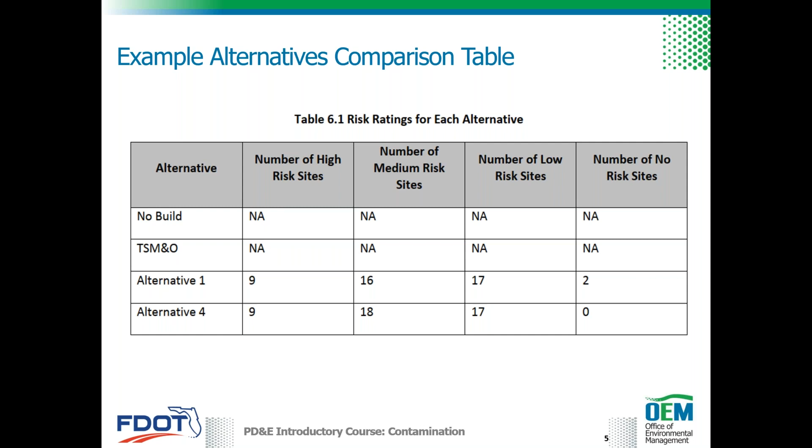Alternatives 1 and 4 were the alternatives that were retained far enough into the PD&E study to be evaluated in the CSER.

I'm going to go over a couple of exercises that show some example CSERs and what was done to address the alternatives. This is the first of the 2 exercises intended to help PD&E project managers interpret contamination information as it relates to alternative evaluation.

The first project example is the proposed Central Polk Parkway, which had a PD&E study done in 2010 and 2011. This project was planned as essentially all new roadway alignment, divided into a western leg and an eastern leg. As far as I know, although I've lost track of exactly what's going on, portions of the western leg have design and construction funding, while the eastern leg has been transferred to Turnpike, and I am not sure of its status at this time.

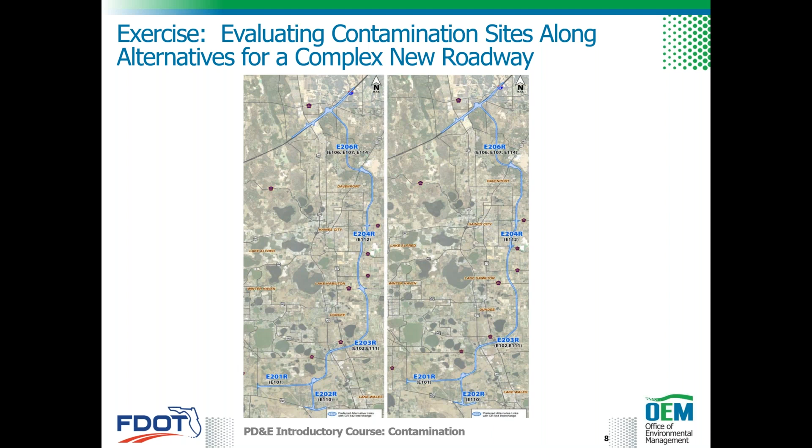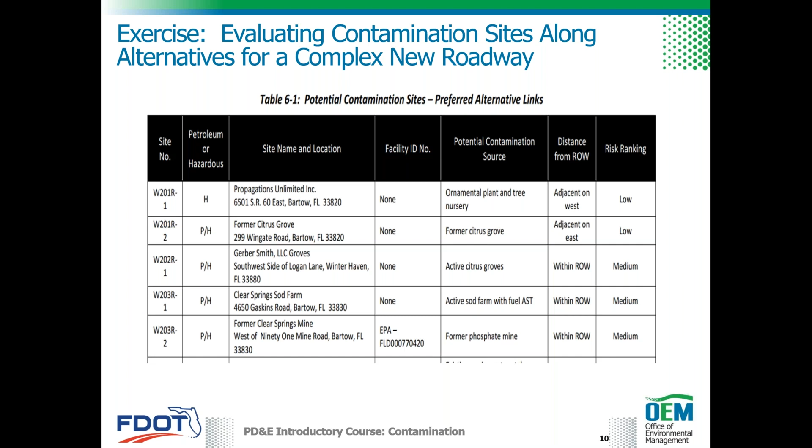This table, which is only the first page, summarizes the site number, type of contamination, site name and address, facility ID number if any, the potential contamination source, distance from the proposed right-of-way, and risk rating for the preferred alternative. For this project, most medium and high rated sites were located adjacent to or within the proposed right-of-way.

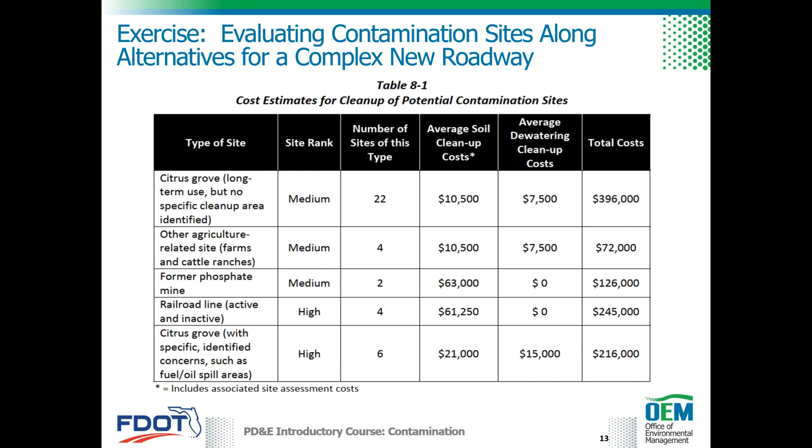However, Part 2, Chapter 20 does not require detailed cost estimates. The cost estimates can be based on experience with similar projects and they will include certain assumptions about how much soil and/or groundwater needs to be cleaned up at each site.

Then I'm going to go over the considerations regarding contamination for PD&E studies and alignments. As we saw from the previous exercise, the CSER is used to determine how many sites are ranked medium, low, no, and high along the project alternatives. This information can be used to develop cost estimates for contamination assessment associated with those sites. The information in CSER is carried into the other aspects of the PD&E study so that the number of medium and high rated sites can be compared with the other resources and costs impacted by the project.

So now I'm going to go into the next exercise, which discusses a different project. This exercise provides an example of a comparison of resource costs and issues for a large bridge replacement project in Manatee County. Early in the PD&E study, a preliminary alternatives comparison matrix was developed. There were several alternatives developed for this bridge along both northern and southern alignments, in addition to the no build and a bridge rehabilitation alternative.

The build alternatives included 2 bascule bridge alternatives for the southern and northern alignments. At this point, prior to review by the district, only 1 medium ranked site had been identified on the project. This particular project went through several reviews, and so the number of contamination sites changed.

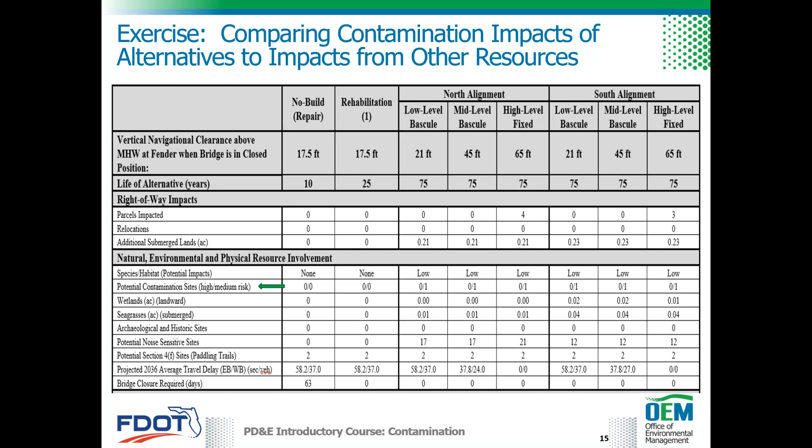During the draft CSER study, 7 potential contamination sites were identified along the project. At first, only 3 sites were ranked medium and none were rated high. However, after the district reviewed the CSER, the district requested that 2 additional sites be ranked medium.

The dewatering operations must consider sites within a 500-foot radius for permitting purposes. This table lists the number of potential contamination sites and their ratings, along with the same type of information provided in the table for the Central Polk Parkway in the previous exercise. This table was finalized after district review and agreement regarding the 5 medium rated sites. In this case, all of the sites have facility ID numbers due to their involvement either with the EPA or FDEP.

After review by the district, the CSER evaluation determined that there were 5 medium rated sites and 2 low rated related sites. This information was carried forward to assist with estimated costs for comparison to other resources.

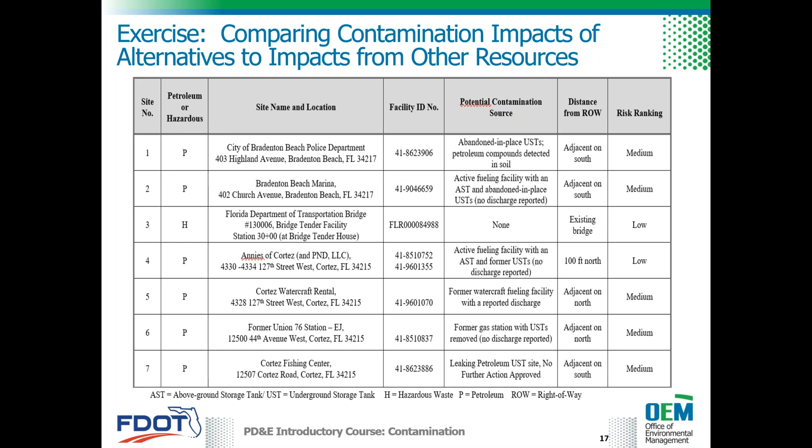This is a type of alternatives comparison table or matrix that is included in the PER. As this particular project continued through the PD&E review process, which required 2 revisions to the CSER, the analysis of the alternatives narrowed down to 2 proposed alternatives that would be carried forward, along with the no-build alternative, which was a short-term repair of the bridge. The recommended alternatives were those determined by the district and OEM as being feasible for moving forward for public involvement and consideration.

As noted on this table, all 5 medium-rated sites are listed for both of the northern alignment alternatives. As you can see, the differentiating factors for the build alternatives include the amount of right-of-way needed, affected parcels, and the number of potential noise sites. Since the contamination impacts are the same, which is just those 5 medium rated sites, they are not a critical decision-making factor when evaluating those alternatives.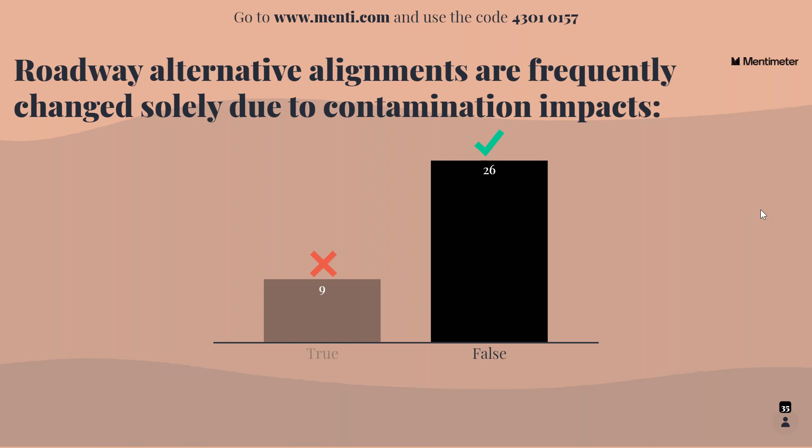All right, false. Nice job, everyone. All right, let's see here. And next. There it goes. Question 2 of 2.

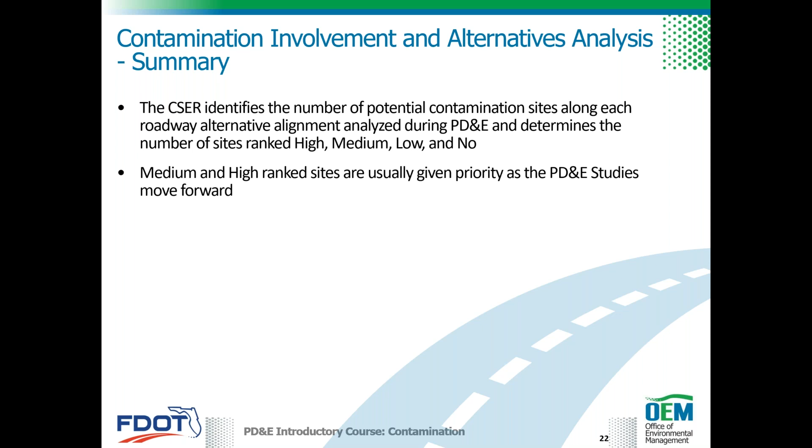The medium and high rated sites are usually given priority as the PD&E studies move forward. The number of medium and high rated sites are usually included in the alternatives analysis matrix of the PER.

Costs associated with contamination cleanup are usually relatively low compared to the costs associated with other project features. The alternatives analysis usually considers other resources costs and costs such as public preference, right-of-way, construction costs, noise-sensitive sites, wetland features, and other factors as determining factors in the analysis matrix.

Once the alternatives are evaluated, the preferred alternative is selected and the project is approved for design, there are some additional considerations. The project's plan and potential schedule should be discussed thoroughly with the DCIC because contamination-related information is a moving target and may change drastically over time. The DCIC is assisted in his or her efforts when provided factors such as likely production and letting dates, right-of-way needs and schedule, potential for advancement in schedule, and potential to become design build.

That essentially summarizes going into the next step of the process.

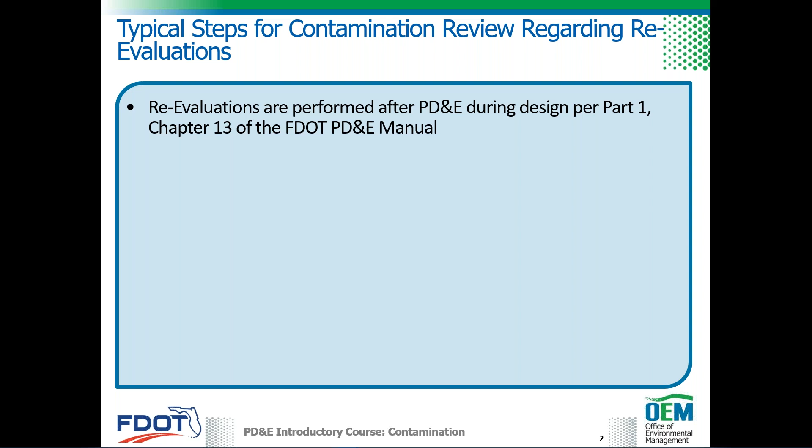This is lesson 6. This is contamination review for reevaluations. There are some typical steps in the contamination review process for reevaluation. Those are all covered in part 1, chapter 13 of the PD&E Manual. You should be looking at any design changes from the accepted PD&E concept that should be reviewed. And in addition to that, you want to look at any condition changes, especially projects that have been shelved for a long period of time.

You should be looking at the desktop CSER that would have been done previously. And you want to look at some of the other information. If there's been a level 2, you want to look at that as well, just trying to make sure that what has been done covers the new design or the revised design. And again, look at the level 2. We'll talk a little bit about the level 2, what items need to be done for the reevaluation, in the following slides.

So we have some primary purposes for this level 2 assessment. One of the first ones is to determine if the design is going to impact any of the identified contamination sites. You're going to look to see if the construction activities that are planned would exacerbate the contamination, especially when you're looking at impacts to groundwater flow direction by pond sites. Those can impact groundwater flow direction quite a bit.

And after LDCA, really all of the medium and high rated sites should have been assessed to determine if there is contamination or to determine that it's not there. And as mentioned before, the level 2 assessments are really only done for projects in the 5-year work program. So if something's been shelved for a long time and gets brought back into the work program, it may need to be updated.

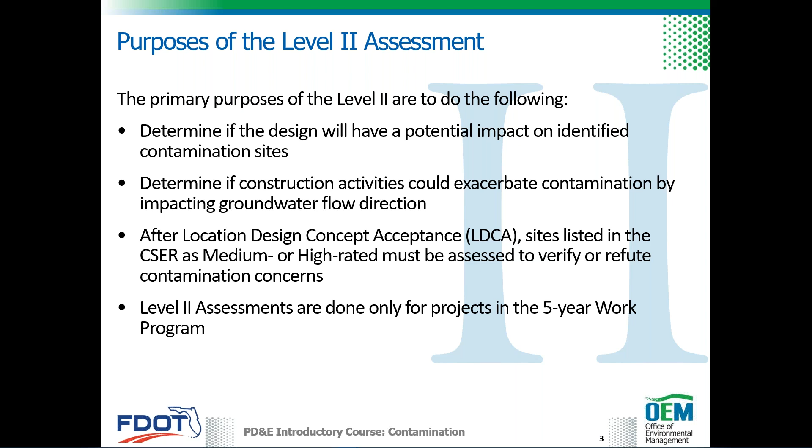Level 2s, as we said before, are done on medium and high rated sites that are identified during PD&E. There are some typical things that are involved. They typically involve field work, typically involve soil and groundwater sampling, both in some cases. And the level 2 should be talking about remediation if it's needed and a cost estimate if they can provide it. Recommendations for avoidance, for minimization of worker exposure, and remediation, usually prior to construction, should also be provided.

When we look at some typical methods for performing level 2, we've got the soil boring to collect the soil samples. These can be done by hand auger or direct push rigs, drill rigs. You're looking at installing temporary monitor wells for groundwater samples. Again, those can be hand installed or by direct push rigs or drill rigs.

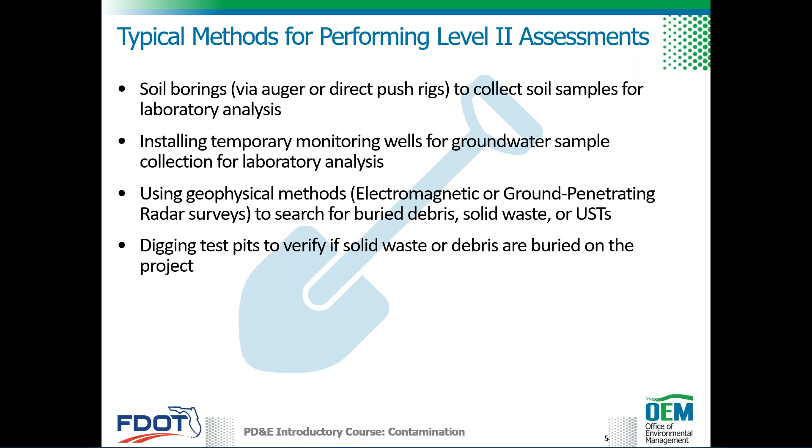You'd be looking at doing geophysical surveys, usually electromagnetic or ground penetrating radar surveys, if you believe that there's buried waste, solid waste, or USTs, especially if the limits of the project or the right-of-way take of the project has increased. Test pits: if you believe that there's solid waste or debris buried on the project, you should be doing test pits. Screening soils with the organic vapor analyzer, also called an OVA. This is really done for petroleum vapors. And obviously, if there are additional ACM or metal-based coating surveys that need to be done, that should be done here.

When we look at some generic examples of what a typical level 2 investigation looks like, we would be doing soil borings and monitor wells in the existing proposed right-of-way in front of the medium and high-rated sites. That would really be predicated on any areas that require excavation or dewatering. Those are ones you really want to look at closely.

The soil borings and temporary monitor wells at the pond sites and FPC sites should be done. Temporary monitor wells for the NPDES discharge permits, that should also be done, hopefully prior to construction. That is really something that can cause the project to really get tripped up if the contractor goes out and does his NPDES permit sampling and then determines that there's a problem. That's not the time you want to learn that there's a problem.

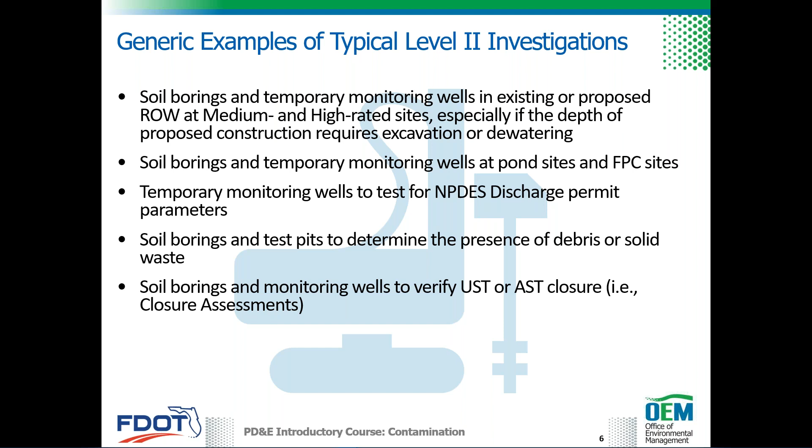The soil borings and test pits, as we mentioned earlier, to determine the presence of the solid waste and debris. Also, if you have USTs or underground storage tanks or above ground storage tanks on the project, you usually have to require a closure assessment, so you could do soil and groundwater sampling for that. And ACM and metal-based coating surveys on the bridges. And asbestos is normally found, as we kind of went over, with scuppers, joint mastic, the class 5 coatings, bearing pads, but also in concrete.

And the timing of the scope is kind of important. So level 2 assessments are usually done at design, preferably prior to the end of the right-of-way phase or phase 4 plans at the latest. It should be done for the medium and high rated sites and should be looking at the full take, partial take, or widening projects. You want to evaluate the primary and the alternative pond sites for both the SMF and the FPC. Sometimes ponds will move through the project and you don't want to have to try to do an assessment later in the project.

You want to evaluate the design changes that may occur. One of the things that is really kind of an important thing is these UWHCAs, the utility work by highway contractor agreements. This is work that would be done for a third party within the DOT right-of-way by the contractor. So a lot of times it won't show up in the plan set until very late.

Revised pond locations, I talked about it. One of those things that you'll always run into is that the original pond site that you're looking for has been taken, or the seller does not want to sell it. So you're going to have to look at a revised pond location where it doesn't work for your design. And construction or excavation that's added to simple projects, such as a resurfacing project. A mast arm, a cross drain, any other drainage features that are added to that project could then impact contamination, so you would want to look at those sites as well.

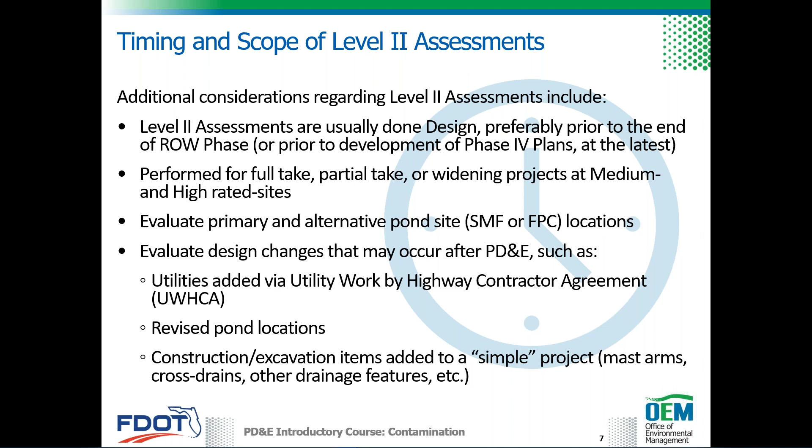For the ICA, or the Impact of Construction Assessment Level 2, there really are several things you should be looking at in that report. First one is an introduction. You want to know what the project is about. You want to have a summary of the methodology, how they went about their assessment, what they did to do that assessment. You want to have some results. You want to know what the results of the soil and groundwater samples are. Normally, you want to separate that up and make sure those are in tables, and we'll talk about that a little bit later.

Conclusions and recommendations. We need to know what their conclusions are in the report and what their recommendations are for either further assessment or remediation. And there should be appendices. This really should be anything that would have been collected as part of the assessment, the soil boring logs, the groundwater sampling, any of the laboratory analysis, and anything else that was done, including the metal-based coatings or ACM survey reports.

When we look at the sampling activities, the report really should show information for each site that's along or adjacent to the project corridor, especially if you have a project that the pond site is not located adjacent to the corridor, but off slightly. The soil OVA readings should be provided in a table, and we'll see that later. And the soil lab results should also be provided in a table, and they should be compared to the soil cleanup target levels. Groundwater lab results should also be in a table, and those should be compared to the groundwater cleanup target levels, or GCTLs.